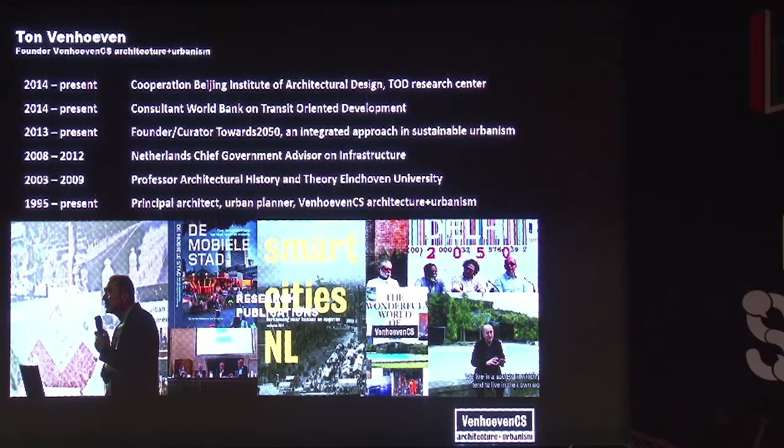What is my own background? I've come a long way. I founded my own company in 1995. I was a professor in architectural history and theory at Eindhoven University. I was Netherlands Chief Government Advisor on infrastructure, and I would really advise you to try and get such a function into the Indian government as well, because as an urban planner and designer, you give a specific angle to policy making.

I'm also founder and curator of Towards 2050, which focuses on research-by-design projects for sustainable urbanism. I work for the World Bank and in Beijing with the BIAD TOD Research Center.

I don't know too much about India, although I come here every now and then, but I know there is a huge mobility challenge. I will also be a jury member of the competition, which will be launched on the 1st of December, for the revitalization of the Maharashtra Nature Park, including a pedestrian bridge connecting Bandra Kurla Complex with Dharavi.

So I think you should ask all the people you know to participate in that competition. I think it's a huge chance for the city of Mumbai and also for the Mithi River and the people living around it. I think, since I don't know too much about India, I prefer to speak about my other experiences, but I think they are very relevant for India.

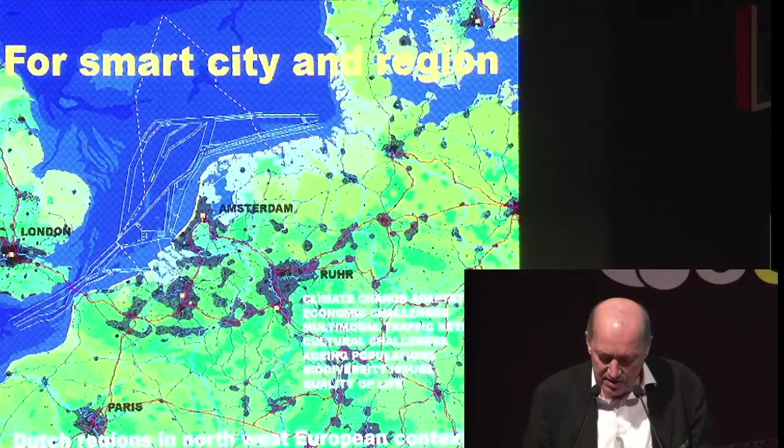We can maintain our networked society and still create a secure system. If we introduce the smart city principle, I don't think we should introduce real smart cities in this regional system, because it's already a quite smart region. There are so many tools which are installed. The dikes are controlled by sensors, so you can check on the internet the quality of the dike.

If people enter Schiphol Airport a quarter of an hour before they enter the border, the customs see on the internet that the plane is entering because the smartphones start searching for connections. This is called smart operations. We've been discussing this in theory over the past two or three years. It's already installed in Schiphol Airport.

But the thing is, what we need to do with all these new technical means is connect them optimally to the physical reality we already have, like the soil, the landscape, the infrastructure, the cities, the buildings, and on top of that we build smart networks. If the infrastructure is not well designed, if the interconnectedness between the bus and the bike and the pedestrian and the private car is not well organized, there is no way a smartphone can improve the connectivity.

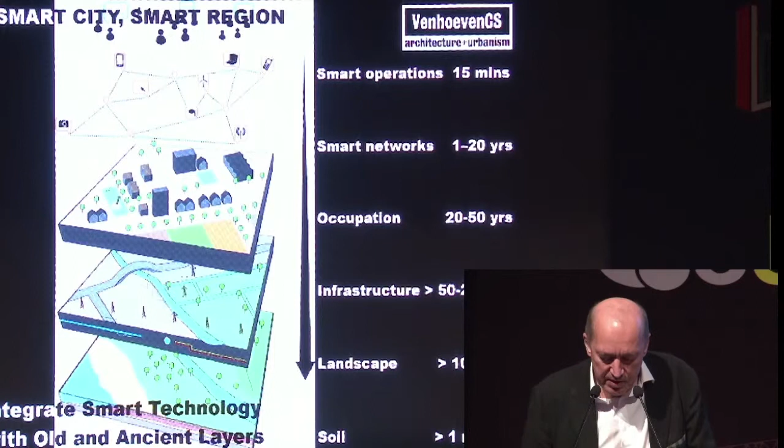So connecting these old systems with the new superimposed systems, that's very important. Another thing which is very important is the circular economy. Everybody is talking in principle about the circular economy. I think we all know it's cradle to cradle. You have the bio cycles and you have the techno cycles.

But what is very important is that if the transportation of waste takes too much money to transport something which is thrown away to a possible second user, it's just thrown away. So the mobility, the whole logistic system of circular economy is a huge challenge.

We have to learn how to take all the small consumer goods, especially the techno goods, from the households, bring them together in a smaller hub, then bring several hubs together to a bigger hub, and then bring them to Rotterdam Harbor and to the world market to be recycled. I think that's totally underestimated, what kind of transportation flows this will create.

In Amsterdam, we have successfully pushed the cars out of the city center, and currently the modal split of the city is 25% pedestrian, 25% bicycle, 25% public transport, and 25% cars. This is very interesting if you think about circular economy, because in the logistics chain, when I order something through e-commerce, the chance is quite big that it's brought to my door through a bicycle, or that I walk to my supermarket and pick it up. So walking and cycling, especially in the last section, is extremely important.

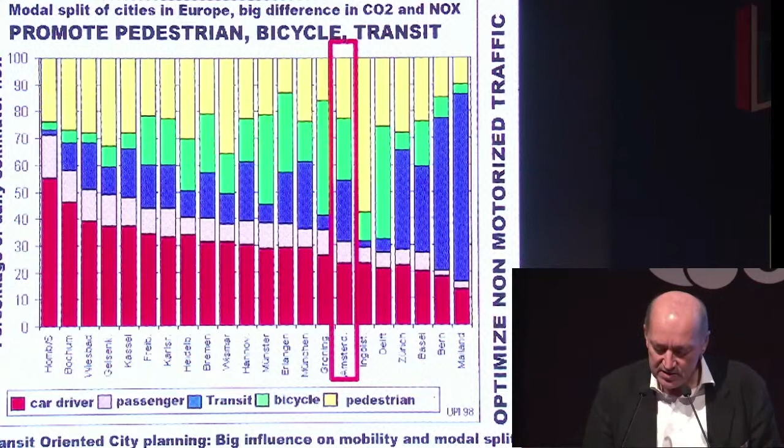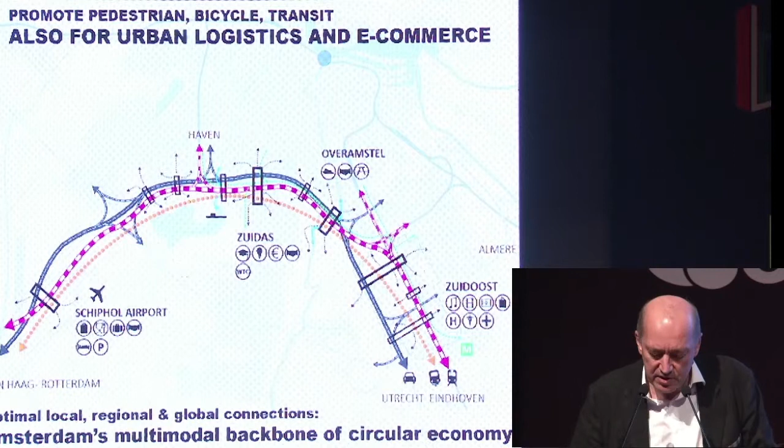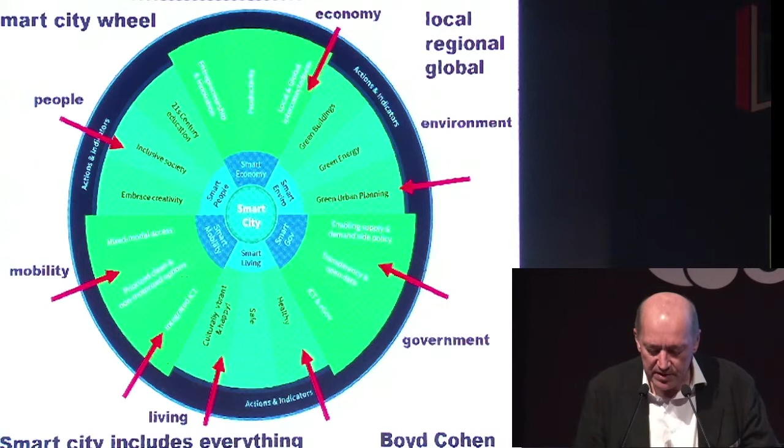Creating multimodal nodes will allow for optimal logistics. Why do I tell all this? Well, it's about the smart city, in practice, in implementation, in its consequences. And I think this picture is a bit a summary of what has been said all day: smart city includes everything. It also includes happy people, but especially also economy and environment, and so on.

So here I summarize what is important for a smart city: smart mobility. And smart mobility doesn't mean only autonomous vehicles.

I had a brainstorm session at the Dutch Ministry of Infrastructure and the Environment, where we discussed the future of mobility. All the specialists agreed that autonomous vehicles cannot drive in cities, because if one person crosses the road, the car stops automatically. So you'd have much more severe traffic jams in the future if you allow self-driving vehicles in cities, or you'd have to create streets that cannot be crossed by pedestrians. Neither of these is very attractive.

This thing is really not solved. But smart mobility is very important, and it includes pedestrian and bicycle movement.

And then the social city, of course. If you don't have a social city, people don't walk, people don't work together. Healthy city, energetic society, creating communities that together organize the city and their life.

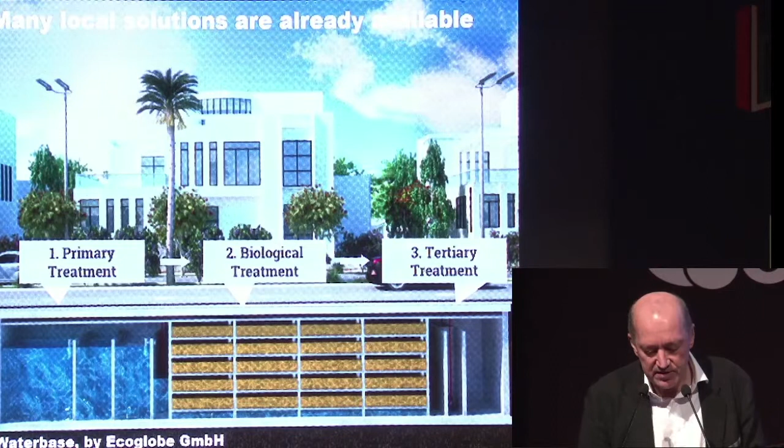Yesterday, in preparation of this lecture, I came across this new invention from Berlin, Germany: a decentral water treatment, sewage treatment plant under the road. It's a small thing you just build somewhere, can be adapted to a hotel, and you can generate phosphate for fertilization and all kinds of things. So this is the kind of technology I'm talking about.

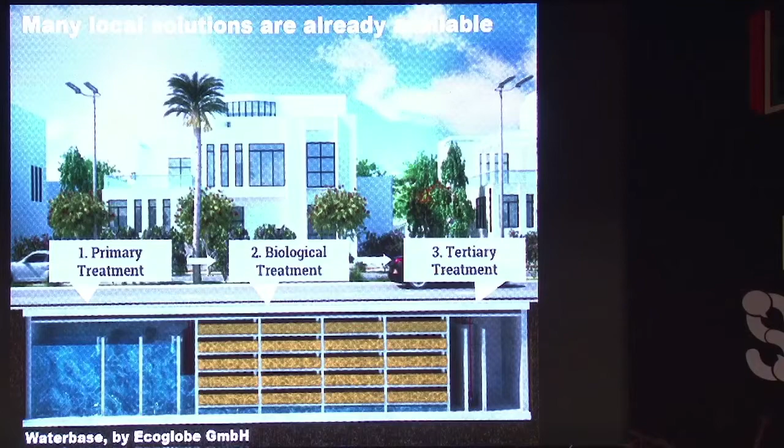So now this is more the theoretical and technical part. Now I'll move quickly through some projects, showing first a rural example in France.

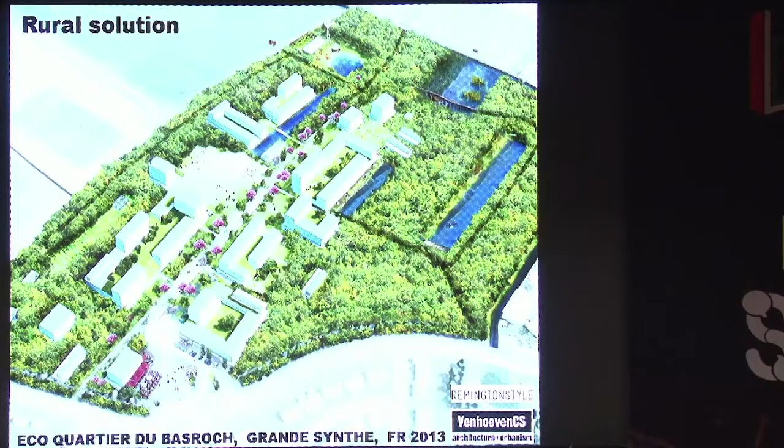It's for an eco-quartier, and you see the ponds—the ponds are used for the sewage treatment, so you can have fish, and the fish you can eat afterwards. This whole village is designed as a self-sufficient village.

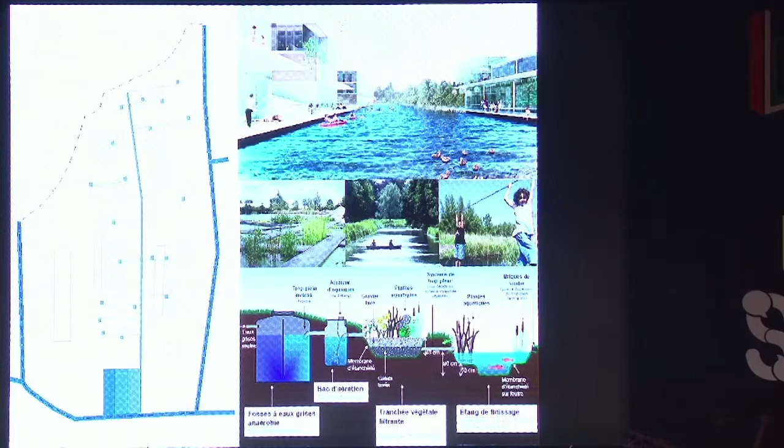There are cars, but the cars are out of sight, because the public space, the street, is really designed to be public space for children, for bikes, and for pedestrians. And there are very nice homes where you can sit on your veranda and look into the forest.

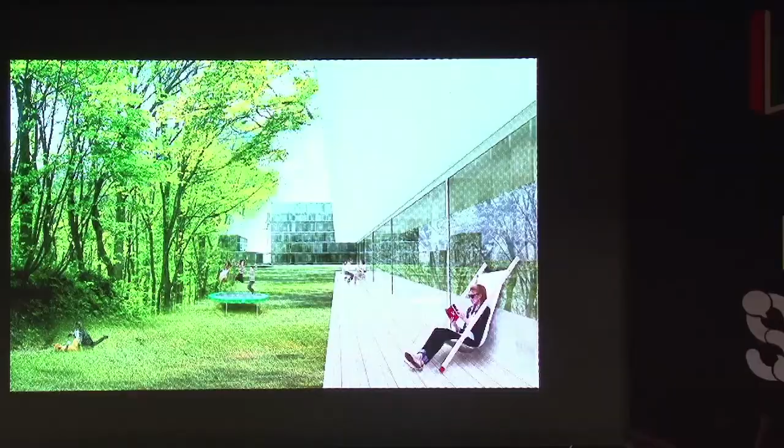But there's also a community garden where you can grow your own food, and of course you can use the fertilizer from the wastewater treatment. And after the harvest, you can share some food. So this is a more rural solution, far away from the larger cities.

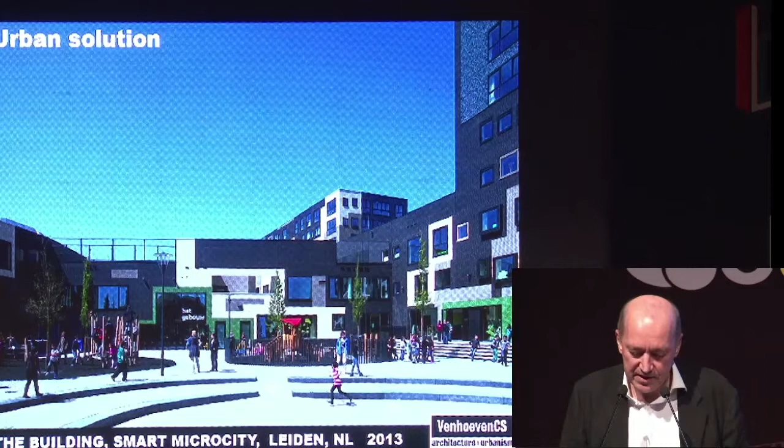This is another project, also an urban solution. It's a community school, for primary school, elementary schools, with youth center, kindergarten, sports hall, library, multifunctional hall, and apartments, also for people with dementia. This is the central part of also a poor neighborhood, and you see when people are picking up their children, it's a multicultural neighborhood. On the roof, people can grow their own food, and they have nice apartments with a view over the city.

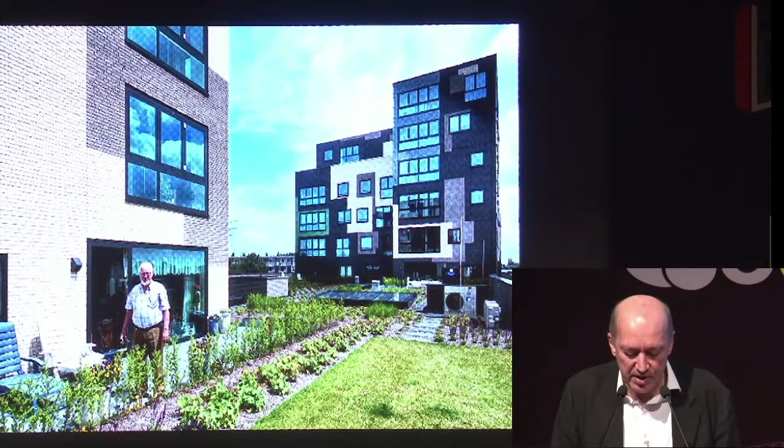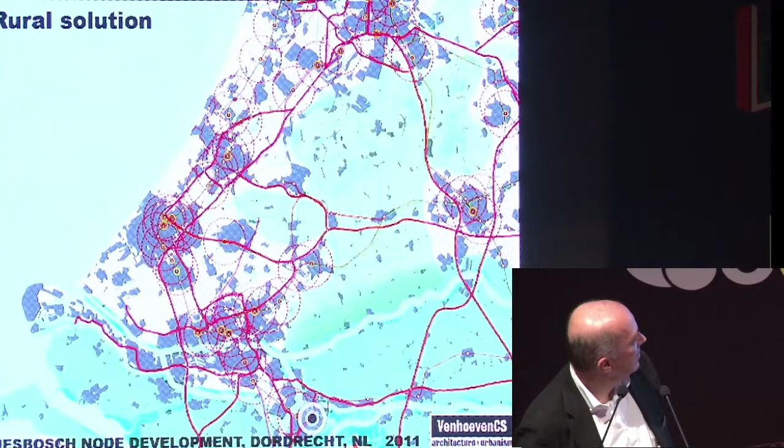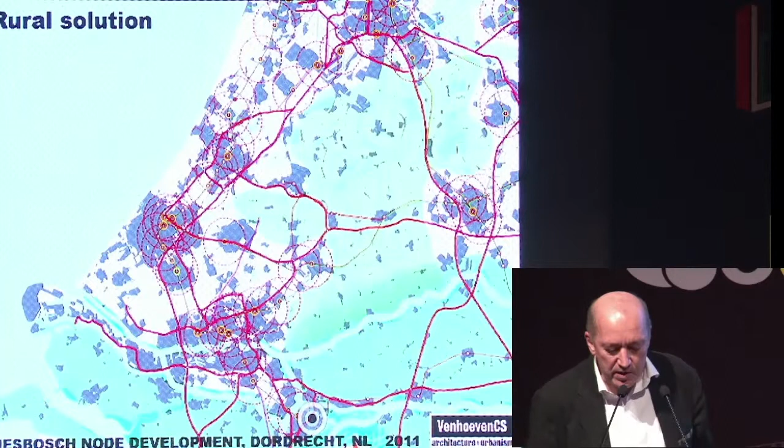Then this is a project. It's the same Randstad, with Amsterdam in the north, The Hague, Rotterdam, and there in the south you see a small dot, and this is exactly where this project is. It's on the outskirts of the Randstad, at this place. With sea level rise, the sea will penetrate the country a bit more in the future. We expect 1 meter rising sea level until the end of the century, but maybe it's 6 meters, then it will be more dramatic.

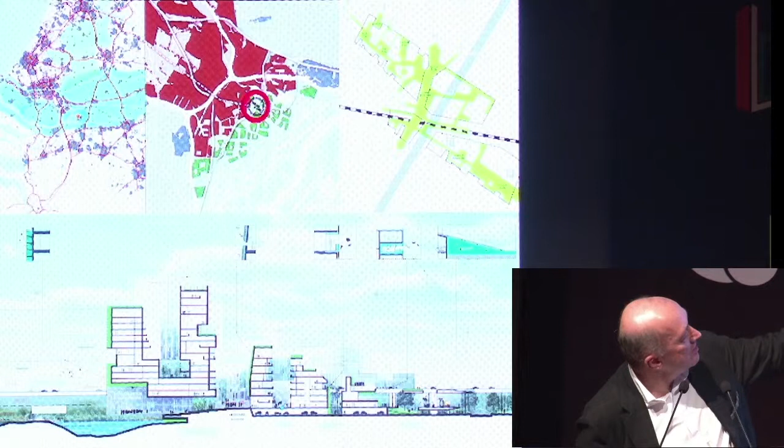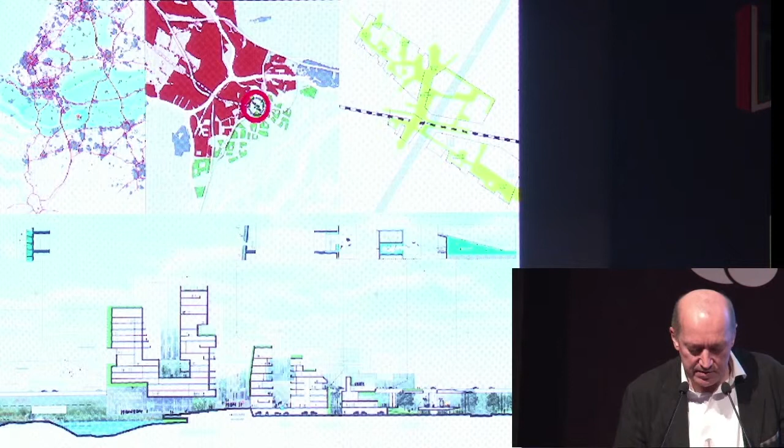But this place is where the train and the highway cross, and there's a soccer stadium, and we use that location to make a multimodal node on the outskirts of the Randstad, so people can change from their private car or autonomous car into the rail system. Here you see what it is like, and you can enter directly into the nature park, have a horse ride, so it's really attractive on the outskirts of the Randstad.

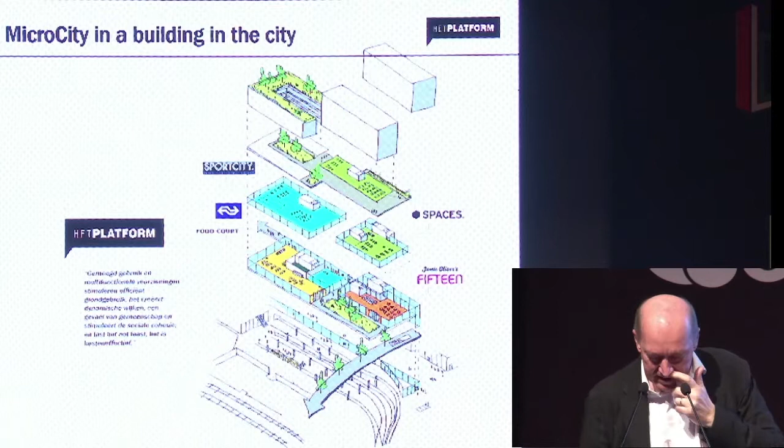Then I have 2 more solutions. One is this project in the middle of Utrecht, the center of the country, next to the National Railway Station. We made this project on top of a tram terminal. The tram terminal is on the ground floor, on top of that some restaurants, a food court, fitness, also urban farming, and then apartments on top of that. Here you see, and I'm actually very happy to see how we managed to connect the restaurant to the street level to create safe public space in the last part to the station.